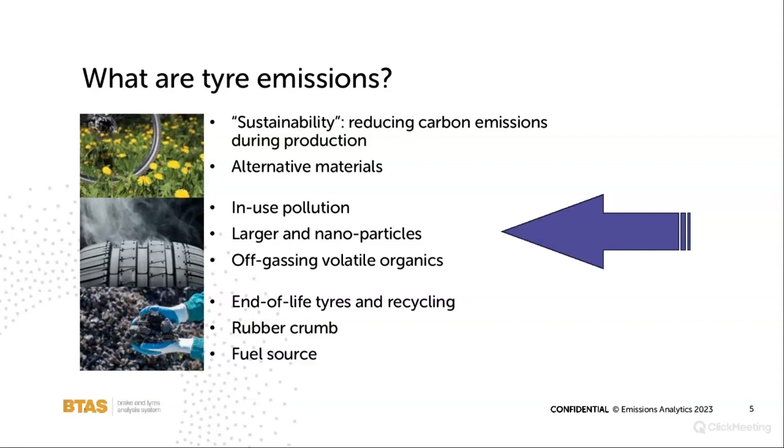There is a third part of it, which is the whole end-of-life question of tyres, and there are probably 2 billion tyres worldwide that come to the end of their life each year, and what we do with those is a real problem. They've historically been used in some combination of rubber crumb soccer pitches, and also being burned in cement kilns and other industrial locations. None of these are ideal either from a pollutant point of view or a CO2 point of view, and therefore there are lots of initiatives around circular economy and repurposing tyres in less noxious ways, but that's still very much work in progress, and I won't even try and tackle that today, maybe a topic for another day.

So looking then specifically at the in-use emissions, the easiest place to start is to look at the mass emissions when a vehicle is being driven in real world or laboratory conditions. And that's because ultimately the approach to measurement here can be very simple in terms of weighing the tyre at the beginning and end of some representative driving cycle. And I'm putting up our results here just to show what results we've derived, but really it isn't the meat of what we wanted to go into today.

But to put it up front, we've tested a range of different models of tyre on the same vehicle, all tested from new on the public highway in a mix of road situations with an average distance of around 5,000 kilometers each. The graph shows you the mean and the distribution of the results we've got over these 18 different models of tyre from different brands. And the average value currently is running at 67 milligrams per kilometre. The range from the 25th to 75th percentile is between 46 and 77 milligrams per kilometre.

But there are one or two outliers, particularly at the top end of that range. There's one significant outlier which remains unexplained because it wasn't some snow tyre or something unusual. It was a mainstream tyre. But this is helpful in terms of deciding what limit value could potentially be put on tyre wear. And if you wanted to restrict, let's say, approximately 20% of tyres currently in operation, that would suggest a limit value around 80 milligrams per kilometre.

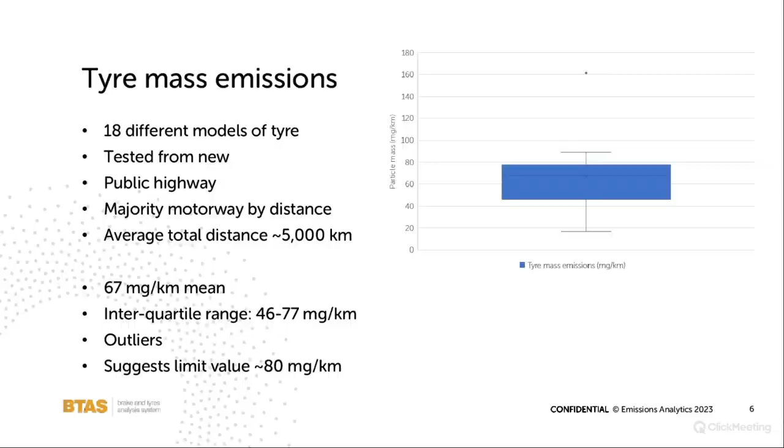But then this is where it starts getting more complicated. So the mass emissions is really the easy bit, and it's only part of the environmental problem, because mass isn't the only metric to use. We also very much need to look at particle number as well. These tend to be produced under much more dynamic driving, cornering and braking particularly.

And what we found from our testing is that only about 11% of the mass is from particles with lower than 2.5 microns in diameter. However, they account for almost 100% of the particles in terms of particle number emitted. So you've got a very large number of ultrafine particles and a smaller number of bigger particles, which account for the vast majority of the mass. And this is in line with the academic literature as well.

And the graphic I've used top right is a good summary across about 15 different bits of research of the modal diameter that people are seeing, and plenty of other researchers are also seeing down to around 10 nanometers in diameter. So I think it's fair to say that it's no longer controversial to say that tyres produce nanoparticles in quite significant number, and there is still debate as to the best way of measuring it and what exactly the values are, but they do exist in significant number.

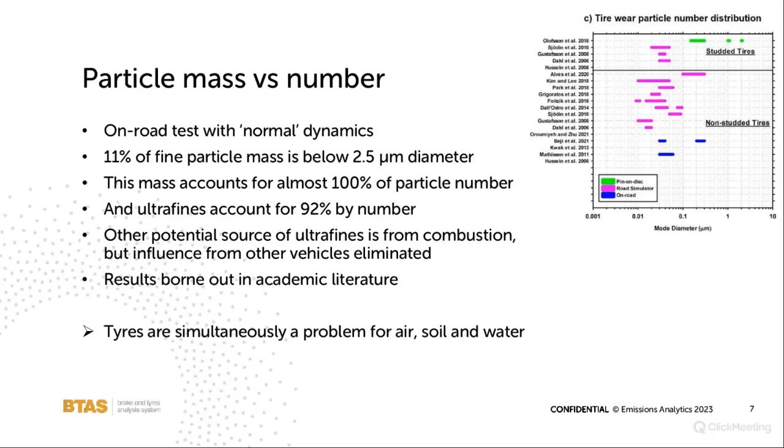But then that's still not the end of the story by far, because tyres have the potential of creating what I've termed secondary pollutants, but actually it's both primary and secondary, in the sense that tyres are made of a lot of organic compounds, largely derived from crude oil, many of which are either volatile or semi-volatile. And so simply as a tyre is sitting there in the environment, it will be off-gassing VOCs. And some of these VOCs are bad for health, with problems from respiration through to cancer. And we'll talk a little bit more about that later on.

So just sitting there doing nothing, they are emitting VOCs, and that can come from the tread and indeed the sidewall. And so the graphic I put up there is the chemical analysis of the tread, which is the blue part, and the sidewall, which is the orange part, which shows there's a lot of similarity in the highest concentration VOCs. There are some differences as well, but they contain significant amounts of these volatile and semi-volatile compounds, which are not great to be released into the environment.

In a primary sense, for direct health impacts if inhaled, but crucially then how they will interact in the atmosphere to create secondary particles. So that's the secondary organic aerosol yield that I talk about, SOA. And if you just take toluene, that has a yield of 4 times. So for every microgram emitted from the tyre, that can lead to 4 micrograms of particles through combination with other components in the air.

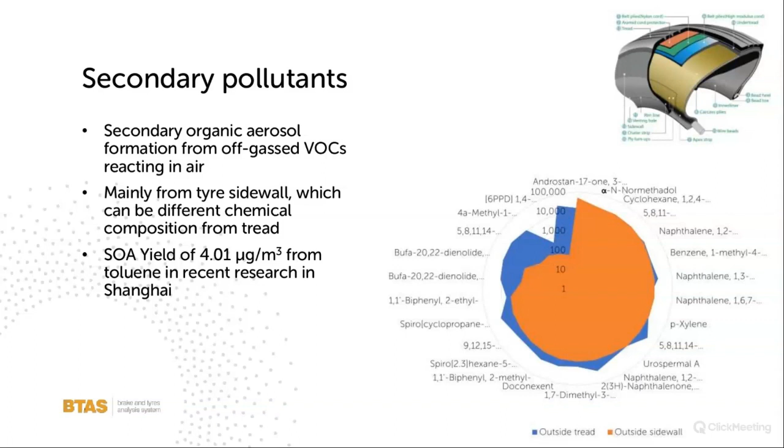And that's before we even get to the issue of ground level ozone and smog, and how these VOCs are a precursor for that as well. So you must think of tyres not just as a source of particles, but also a source of VOCs, and then look at those complex interactions. So that's why they're a problem and why they need so much study.

In terms of the regulatory trends, well, from being nowhere on the regulatory agenda a few years ago, it's now shot up through different motivations. The primary motivation in the United States, as I'll come to, is marine health of aquatic life. In Europe, it's been driven by electrification. So our move for decarbonisation to electric vehicles has led essentially to much heavier vehicles, and that has the potential to increase tyre wear, which I'm going to come on to in a minute.

And so by including in Euro 7 a limit value on tyre emissions, it is trying to cover off that risk that it will just swap decarbonisation for other environmental problems. So Euro 7 has the proposal, or at least a placeholder in the proposal, for putting this limit value on new tyres. It's more sketchy, in my view, in terms of how this would work for the replacement tyre market.

So when you go in for first and subsequent changes of your sets of tyres, the problem being people may not follow the same brands and go for some cheap and nasty tyres second time round. That needs to be fleshed out more. The test method is still not established, but the Task Force on Tyre Abrasion at UNECE is working on this frantically and making decent progress.

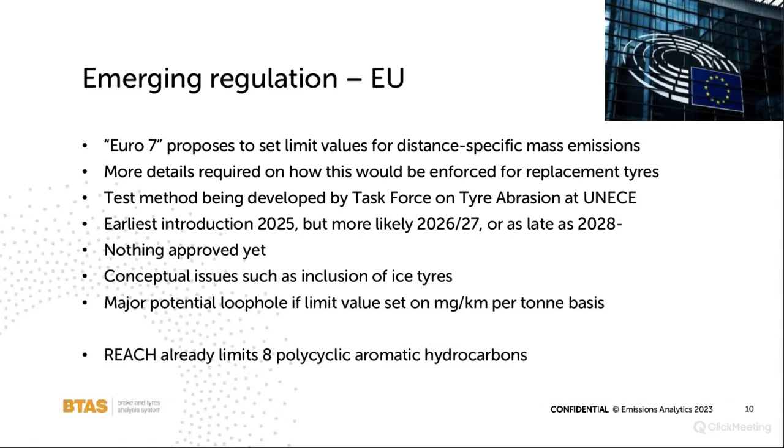Euro 7 is not the only part of the European regulation. REACH, the chemical regulation, has for many years regulated 8 polycyclic aromatic hydrocarbons, and that's being expanded in terms of the number being covered. So in a sense, that was the earliest element of chemicals being regulated in tyres.

And the California rule, which is literally just coming in now, forces manufacturers to investigate alternatives to 6PPD. The reason it's not just banning it is because there is no viable alternative to 6PPD really proven yet that is less toxic than 6PPD. But the California rule is forcing R&D into that, or for the manufacturer to remove the tyres from sale in California.

There's a very accelerated timeline on this, impressively accelerated timeline: the initial submissions to the California EPA need to be in by November this year. So it's really pushing it along.

The downside to flag is that this actually, as legislated today, is only a one-off exercise. So the tyre manufacturers all have to investigate the alternatives, make their submissions, do what they then decide to do. But there won't be every X years a similar review again. So it may be that there's no alternatives to 6PPD today, and we all carry on, but there might be one that comes along in a few years' time, and it would be interesting for California to look to make this a recurring assessment.

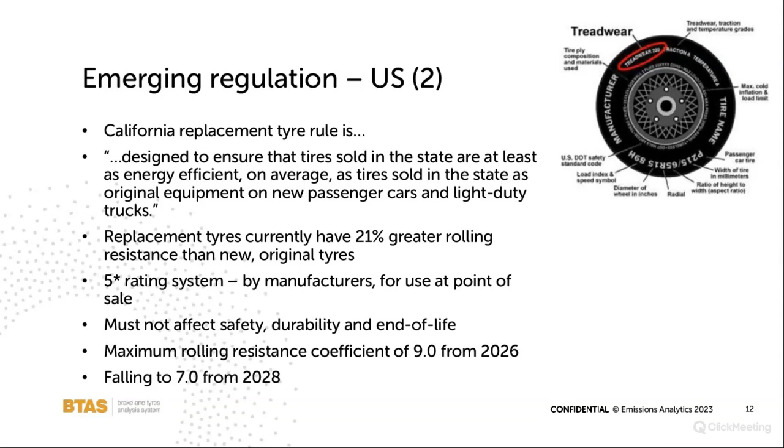Then there are limit values which are slated to come in. So the maximum rolling resistance coefficient is going to be capped at 9.0 from 2026, and then ratcheting down to 7.0 from 2028. So there is, from not much a few years ago, now a lot of activity in this area. So our experimental approach is as follows.

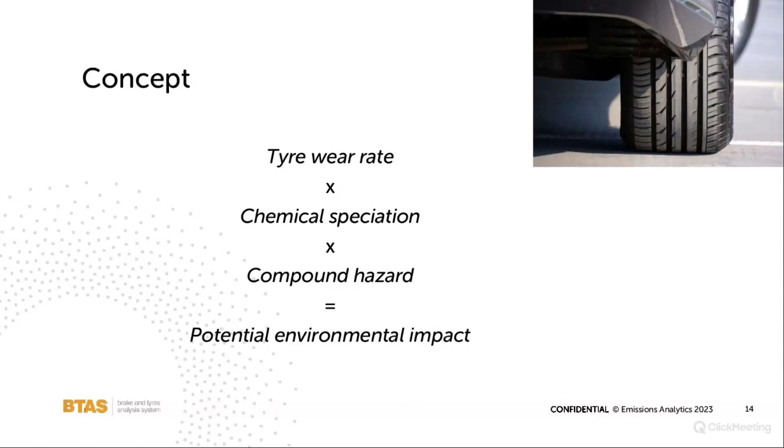So there are the 3 key bits to characterize tire emissions: the wear rate, the chemical speciation of what's in those tires, and then how hazardous those compounds are. And that's the best way to get the overall environmental impact.

And the component parts are, and I have shown this slide in some places before, but we have designed an on-road sampling mechanism, which is a universal fitment across all vehicles without modification to the vehicle, which articulates with the steering wheel, but in a way that's road safe and legal. And then the sampling mechanism can theoretically be coupled to any form of detector or collection receptacle. And it's a patent pending system.

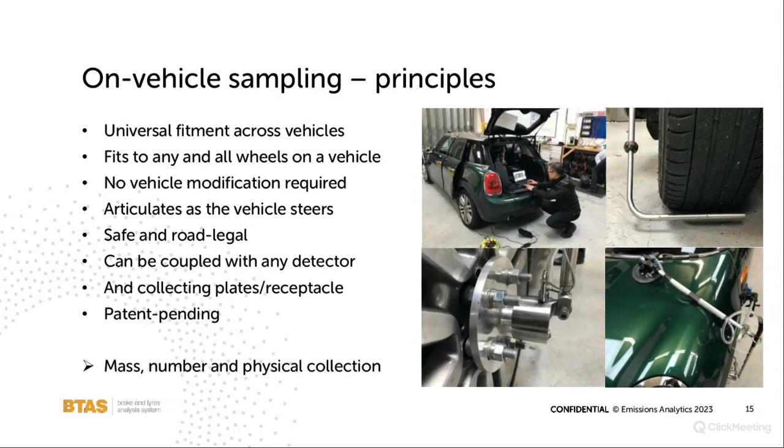And it doesn't pretend to be able to collect all particles. It's not intending to do what the tire collector is intending to do, which is to collect as much as possible, but it is enabling sampling at representative locations in a very flexible way in real world conditions.

Then the chemical fingerprinting side, that's where we can take either a sample collected on the road or chunks of original tread, and effectively, if it's original tread, as close as possible reverse engineer the chemical composition of the tire using 2-dimensional gas chromatography and time of flight mass spectrometry and a multi-stage pyrolysis process that we developed and validated. And the uncertainties have been characterized by the National Physical Laboratory in London.

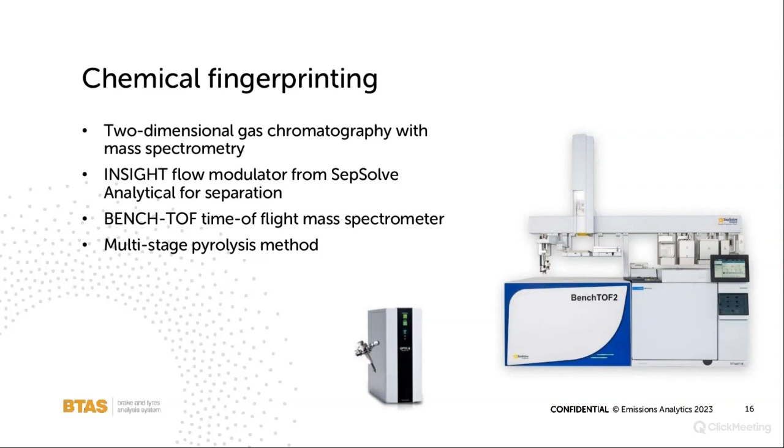And this sort of approach can never be perfect. There will be certain compounds that break down under pyrolysis, but they break down in a predictable way that allows us to work backwards from the compounds that we do observe to what is likely to be in the tire. That said, most of the compounds through our method do not break down through this process.

And the final bit of the 3-stage evaluation is to look at the hazards. And there's obviously a huge amount of academic work going on to expose tire particles to humans and animals and the like to come up with primary data, and we're part of many of those. But in the meantime, we've developed a hazard evaluation using the European Chemicals Agency hazard codes submitted by manufacturers at the individual compound level. So they disclose when they're selling a product what's in the products and their hazards.

And so we've used that data, merged it with our data, put a severity index against each compound, and that allows us to come up with a single value, either for a compound or then weighted up for a whole tyre, weighted by the concentration of that chemical in the tyre, so we can get to a single value for a tyre as well.

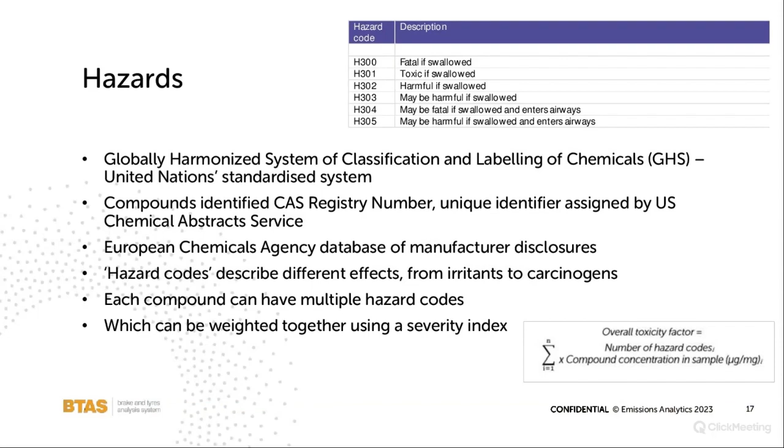Now, there's obviously the question of dosage and exposure time, and so I do not pretend this to be the last word on toxicity. It's in a sense the first word on it. But we have done correlation exercises with other metrics for hazard, and we get a fairly close correlation between this and other measures. So we think it's a reasonable starting point. So that's the background, the regulation, and the test methods.

So what does it say particularly about battery electric vehicles? And so what's the challenge? I mean, the challenge, some would say the allegation, is that battery electric vehicles are on average heavier, and this extra weight combined with the extra torque, the almost instantaneous torque, at low speeds particularly, of BEVs leads to higher tyre wear emissions.

And it's a particularly touchy subject because recently the particles from the tailpipe have fallen dramatically due to not just putting particle filters onto vehicles, but the increasing filtration efficiency of those filters over time. And we've shown in the newsletter, Gaining Traction, Losing Tread, which is on our website, that the ratio today on modern vehicles is almost 2,000 times more tyre wear mass emissions from all four tyres on a vehicle compared with the tailpipe. So that's one of the reasons why, from a regulatory point of view and priority, this has now shot up the agenda.

And that's combined with actual studies, partly done by us but done by other people as well, which have looked at what is the effect on real-world tyre emissions of this extra weight and torque. And we came up with figures, depending on the experiment, of between about 20 and 25% increase. Michelin, for example, have done their own completely separate study from us; they quoted a figure of 20% publicly, and the research is actually 10% to 20%. But nevertheless, that's very much in the same ballpark as what we're saying.

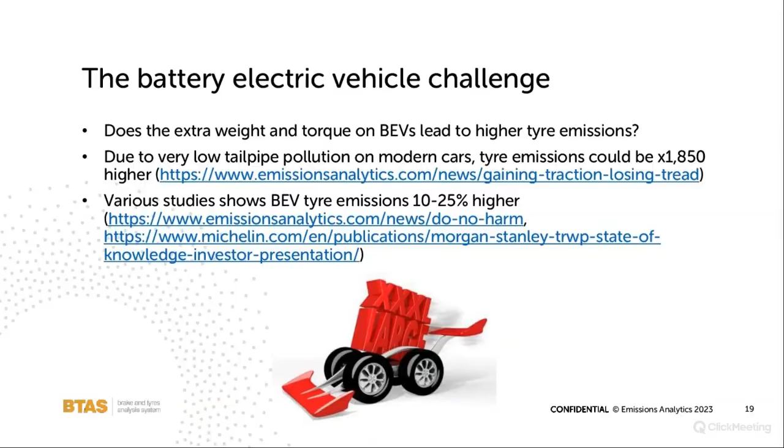So that does look on the surface of it like BEVs do lead to higher tyre wear emissions. However, and this is where it starts getting somewhat complicated, what comparison you make really does matter. What is an equivalent pair of vehicles? Should you make it on the basis of the maximum payload of the vehicle, the empty weight, the power, the maximum speed, maybe the cost, or something else? Should you factor in regenerative braking or not?

All BEVs have significant regenerative braking, but some ICE vehicles do and some don't, particularly through mild hybrid systems, and obviously the full hybrids do have regenerative braking. Should you take into account any torque control features, the various driving modes that a vehicle has, which one should you choose? They can all make a material difference, and there's arguments on many sides as to what the right comparison should be.

But then also the comparator tyres matter. Should you take the tyres as were on the vehicle when the manufacturer sold it new? Should you take it with the tyres brand new or after a few thousand miles? There's many different factors which can affect the end answer. And also in making the comparison, this isn't just about mass emissions. What if the BEV tyres were more toxic, that they managed to reduce the wear but at greater toxicity? So what that comparison is matters, and it can lead to long and drawn-out arguments.

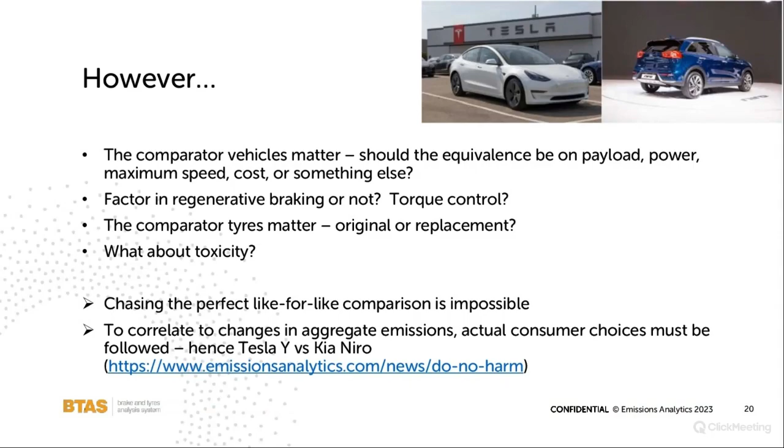And I think the conclusion you have to come to is that chasing the perfect like-for-like comparison is impossible. We would justify the ways we did it, including in the article we did called Do No Harm, where we compared a Tesla Model Y to a Kia Niro hybrid, as fair a comparison as you possibly can get. Because it isn't just about comparing on characteristics and specifications. It's also what real choices consumers are making in the marketplace, because ultimately we're trying to reduce aggregate tyre emissions into the environment. But no doubt I will continue to have arguments about this forever and ever.

But let's set that aside for a moment and look at the trade-offs. So even if we may not be able to come to an absolutely definitive conclusion, what are the trade-offs? And the one thing we can be certain of empirically is that BEVs are heavier. That trend is clear at the moment in the marketplace, and that is correlating with having bigger tyres, which means for every extra 100 kilograms of passenger car weight, and this is passenger cars only, it empirically seems to lead on average to an increase in tyre width of 4.8 millimetres, which is about 2%.

And a 0.27 inch extra rim size, a 2% increase, very slightly lower profile tyres, and 0.32 square metres of extra surface area, which is about 4%, which leads to extra tyre emissions of about 2.2 milligrams per kilometre, so a 3% increase on average, and 2.8 micrograms per minute extra off-gassing of VOCs due to that greater surface area, so about a 4% increase. So heavier, higher load vehicles need bigger tyres, and that's what it empirically looks like today. That's not to say there may not be some design breakthrough that might change that in the future, but that's what it looks like today.

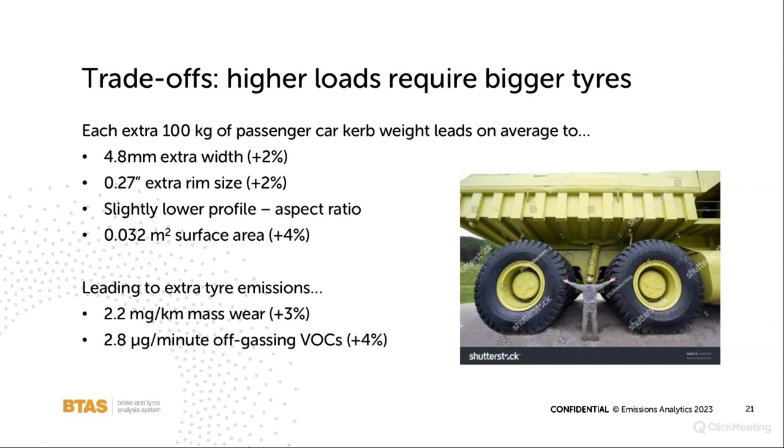Because actually, I should say they are faster wearing in terms of mass and more off-gassing. So from an environmental point, through their bigger size and the loads, they are shedding more mass and more VOCs into the environment. But what about the toxicity part of it?

Well, it turns out that it seems that through the clever engineering of the tyre industry, the toxicity potential, as measured on our normalized scale that I talked about, seems to be better. In fact, 4.3% lower potential toxicity. And this is driven, it appears, by significantly lower concentration of aromatic compounds.

And so you can see quite clearly visually that the mean does decline pretty smoothly across the increasing rim size, even if the variation within each of those classes is still significant, and that must be noted.

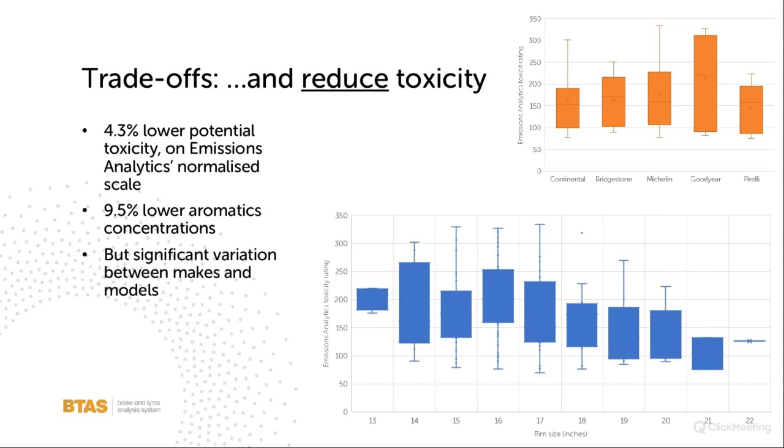But nevertheless, we must put it out there that yes, these electric vehicle tyres and these vehicles may be heavier and wear more, but it looks like at the moment today, the tyre material is potentially less toxic.

Finally, on these results, I focused on the European side. The US side is always rather different. We've done a similar analysis on US tyres, and there are many similarities. You know, the bigger the vehicle, the heavier duty of the tyre, the wider, the taller, the larger rims go along with that.

Probably US tyres being sold for durability first and foremost, rather than rolling resistance and the performance characteristics of actually going around corners and the like, leads to simpler formulations which are less toxic. It would be interesting as the impact of the US regulations bites, what that trend will be, and that's one of the points of the ongoing studies we will be doing, is to track how that develops.

So that's the data, what the data shows, and the interesting enigmatic position with BEV tyres. So what we're doing going forward is the following. So we've got an ongoing program of testing both the wear rates and the chemical composition, and we're going to be assessing in 7 dimensions as shown in this chart.

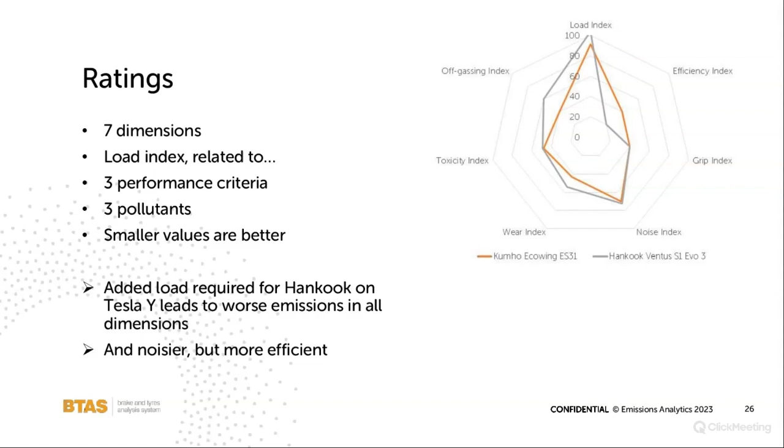The Hankook tyres were worse in all of the pollutant dimensions than on the Tesla Y, and were noisier, but had better rolling resistance, so more efficient. So we can see there in a very neat encapsulated way how those different trade-offs are expressed in new tyre formulations.

Moving on to, I don't know why there was a pause on that slide. Maybe it was a dramatic build-up to the results for 6PPD.

So 6PPD, this is the results across all the tyres we've tested so far, and 6PPD has one of the honours of being a compound that has appeared in every single tyre we've tested so far. But the concentration varies hugely, and that's what this histogram shows.

The blue bars show the frequency distribution by concentration bands of the 6PPD. And as a pointer to regulators, it should be said that there are some today, even though they have 6PPD, it's very low concentrations. So why not incentivize everyone down to that low end?

That might be a better route than trying to get rid of 6PPD completely and spend a lot of time and effort finding some alternative. But thinking of California as well, there are also substitutes beginning to appear in tyres. So one of them is IPPD, which we're seeing in about 10% of tyres, and is a substitute for 6PPD. And the orange bars are the concentration distribution that we're seeing today.

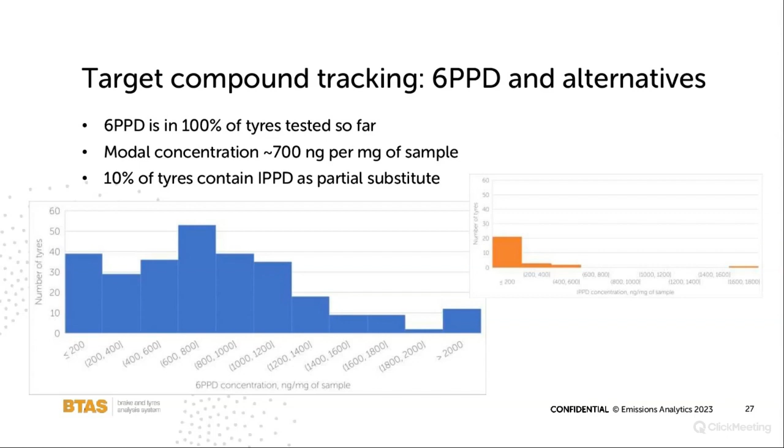Now, the problem with IPPD is it's not necessarily any less toxic than 6PPD. So yeah, it's a substitute, but is it a good substitute? So that's still very much work in progress in California.

So in conclusion, when we stand back from all this, why are we bothering putting in such a large amount of effort into this relatively unglamorous area? It may be relatively unglamorous, but it is a very important environmental area, and I've described tyre emissions as omnipresent. We're probably looking at about 6 million tonnes of just wear material per year globally, which is roughly 4 kilos per car per year, so 8 pounds.

That excludes completely the up to 2 billion end-of-life tyres per year, and we're trying to find something to do with those as well. Larger particles get released into the drainage systems, largely of roads. Fine particles will be the ones typically settling by the roadside and within a short distance. Then you've got the ultrafine particles, which stay airborne potentially for a long time, and whose fate is still rather uncertain. But what it does show is there are multiple vectors for human inhalation or ingestion. And that's before we start talking about animals and fish.

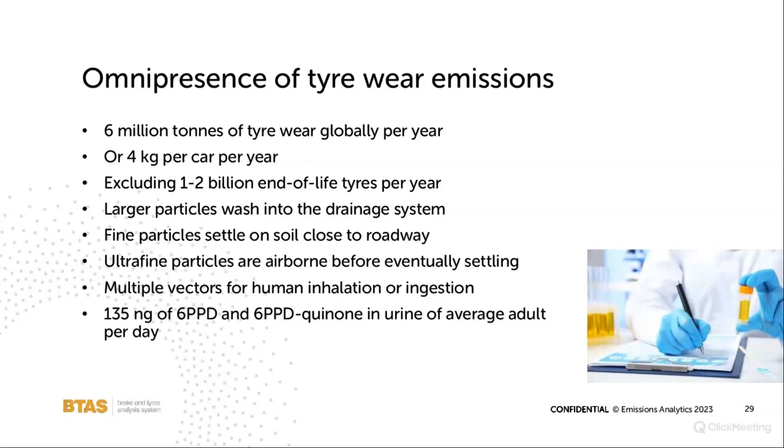The most sobering of all through the research we've been doing was the research that came out of China, which studied the quantity of 6PPD and 6PPD-quinone in adult urine. And the figure that they derived was 135 nanograms per day of these two chemicals together being detected in human urine. So even though there are still lots of informational gaps and how these particles find their way is not fully understood yet, because 6PPD primarily comes from tyres, we know the source and we know that it's passing through us and then going somewhere else. If there's one thing to hang on to as to why we should be worried about this, that is it.

So the key messages in summary: I think it's fair to say tyre emissions is a more complex and significant problem than previously thought, and there's certainly no simplistic answer that battery electric vehicles have terrible, much worse tyres and that therefore they're evil and ICEs are good. No, all vehicles have tyre emissions. It definitely seems to be a function of weight. So BEVs having a weight problem is an issue, but there already seem to be some mitigating factors in toxicity that are in place. But be careful of averages, as always.

The high variability within each class that we've looked at and within each manufacturer does matter, and is why regulation does have a significant role. And the combination of tyre and the vehicle. We can't just look at tyres in the abstract. How they interact with the performance of the vehicle is very important. And so we need to look at not just new vehicles, but also regulating the replacement market.

And if you put the worst tyres on a big heavy BEV, you're probably going to get the worst possible outcome of all. But then we also need to be conscious of the economics of it as well. These BEV tyres, there's the good news potentially that they're less toxic, but they are much more expensive as well on average. So that's potentially a distributional justice issue as well. So in essence, we would say developing regulation must be holistic and empirically informed.

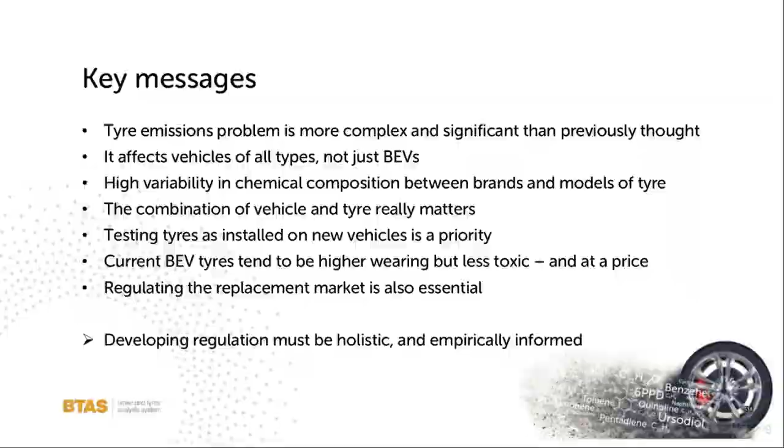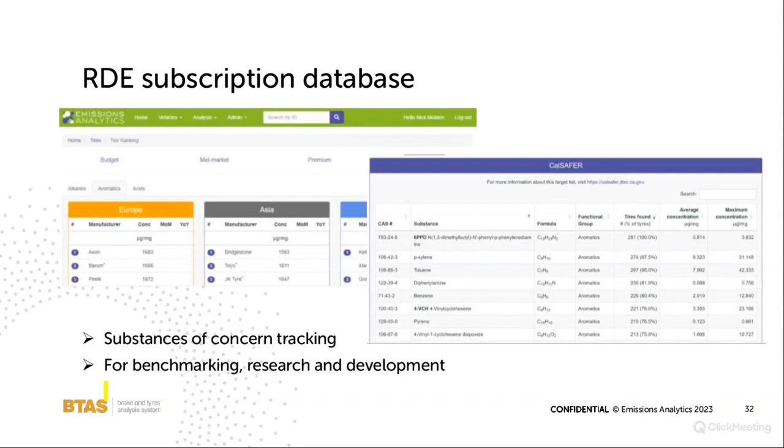But we're very excited to announce today, for the first time actually, that we will be taking a further step in terms of activity in this area by launching two conferences that we'll organise next year on the specific subject of tyre emissions and sustainability. The first of which will be in Prague in February, and then a follow-up one in April in Southern California, which the aim is to bring together like-minded people looking to try and get to the bottom of this problem in the most effective way, and to network and to present the latest findings.